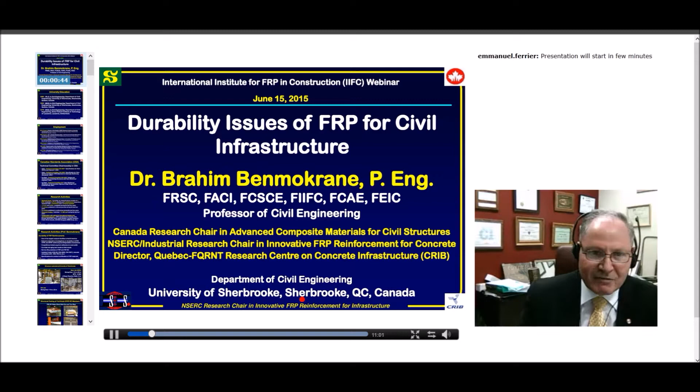Briefly, my university education: I graduated in '79 in civil engineering from École Polytechnique Fédérale de Lausanne, in Switzerland. Then after 4 years as a consulting engineer in Lausanne, I moved to Quebec, Canada in '82, at University of Sherbrooke, and I completed my master's in '83 and then my PhD in '86 at the same university.

From '95 to 2009, some of you may know that we had here in Canada a research network of centers called ISIS Canada, and the impact of this center was really huge here in Canada and in North America.

So during 14 years, we worked in this field of FRP, internal, external, and also on structures monitoring using fiber optic sensors and things like that. This was really a huge achievement made through this network of centers, with a lot of development of codes, design guides, and so on.

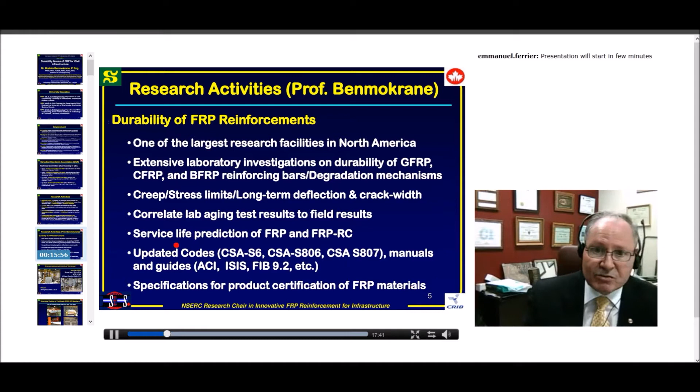Briefly, before going to the main topic of today, I wanted to show you some projects that are already completed, or some that are ongoing. You can see here, of course, I will be coming back to the durability issue and material issue. So here I will show the next slides mainly about structural testing.

This is one view of the old structural labs that we have. It has a strong floor, 10 meters by 20 meters. You can see here one full-scale underground chamber under test, a shear wall in the back, and one bridge pier under testing. We have many graduate students using it.

Also in 2009 we had a new structural lab, which has a strong floor 12 meters by 20 meters. We have an MTS machine of 16 meganewtons, and as you can see here, some L-shaped reaction walls 12 meters long. I use these walls mainly for testing shear walls.

I am planning in the future to test here one building having 4 floors, including all slabs, beams, and columns, internally reinforced with FRP, and looking at its behavior under gravity load and also under lateral load, mainly for seismic.

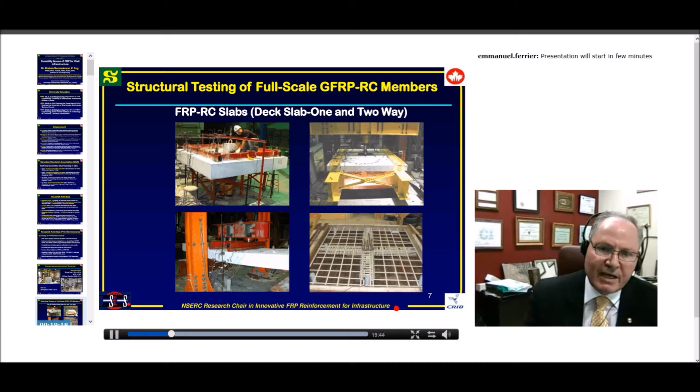This is two-way flat slab for parking garages. This is two-way slabs for bridges. You can see here we put the flexure reinforcement and also shear reinforcement made with FRP, as you can see in this photo.

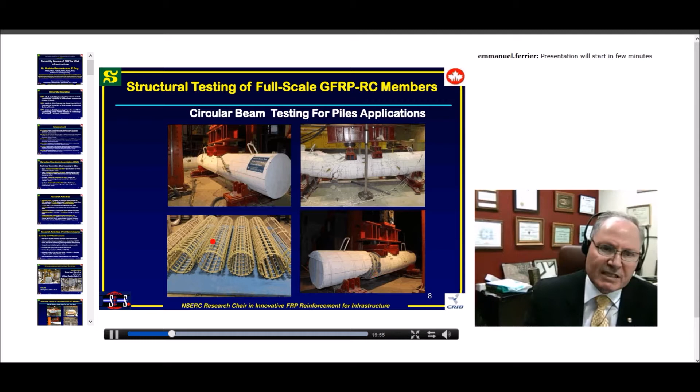Also, we tested circular beams. This is mainly for pile application, under flexure and under shear. You can see here the internal reinforcement, the cages.

Also, as I said before, we tested shear walls. This is mainly to look at the seismic behavior, mainly for building application.

We just also recently, in fact 2 weeks ago, completed testing columns. These are all reinforced with GFRP, under quasi-static loading, looking at drift, energy absorption and so on. We got really very interesting results. Some of the columns even went up to 8% of drift without any strength decrease, which is very good behavior. We looked at the behavior with different longitudinal reinforcement and also different lateral reinforcement for the concrete confinement.

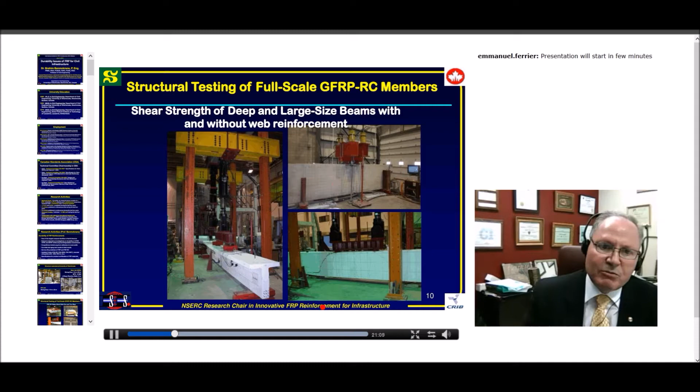Also, this is another view showing shear strength evaluation, T-beam section size effect here. This is to have 1.2 or 1.4 meter depth, and this is also about the deep beam that we tested with one PhD student.

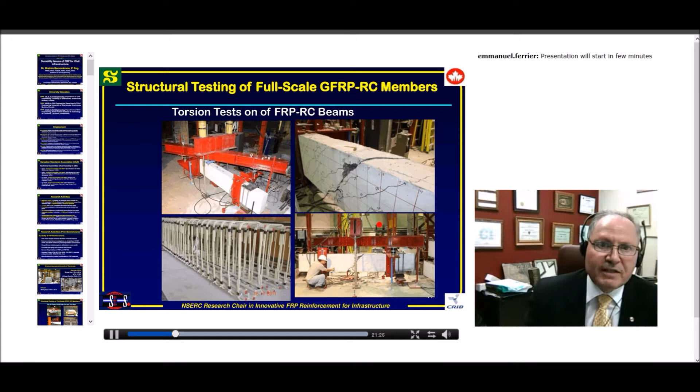Here also we did extensive work on torsion. We looked at this type of loading, and it happens often in bridges and also in parking garages to have this kind of load about torsion. Also we tested columns, rectangular section, circular section, short columns, slender columns with glass, with carbon.

Under concentric loading and also under eccentric loading, we are now establishing the moment load diagram interaction. We have really huge work on that, and this is mainly for code development and so on.

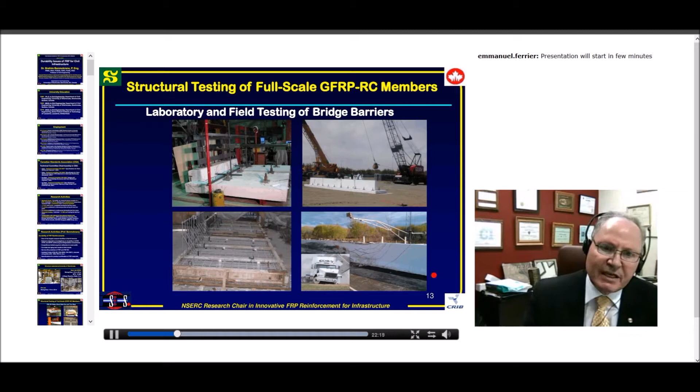And also we tested, as you can see here, this is bridge component, including barrier walls. As you can see here, this is under static load in the lab, and here under impact load in the field, and also this is under crash test we did in Texas, exactly how it has to be tested to approve the material.

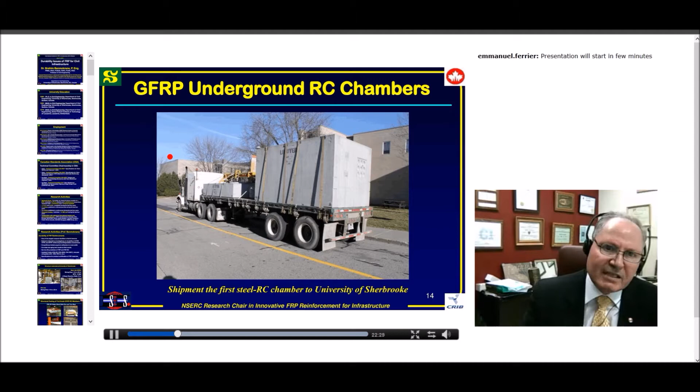Sometimes also we are bringing precast full structures for testing. As you can see here, the chamber, the transportation to the lab, this is during casting, and they were tested recently here in the lab.

Also, of course, from the lab, all this structural testing that I just showed you, some of it really helped for developing new applications with GFRP reinforcement. And of course, we move it to field applications. We have to do that because we can know more about the material and increase the extension of the use of this kind of material.

See here, I can show you a couple of bridges. You have one span bridge, you can have a continuous span bridge in cast-in-place concrete, as you can see here, or with precast element. I myself was involved in at least 15-20 pilot projects instrumented with fiber optic sensors. But in Canada, we have more than 400 bridges now where GFRP were used in the deck slabs.

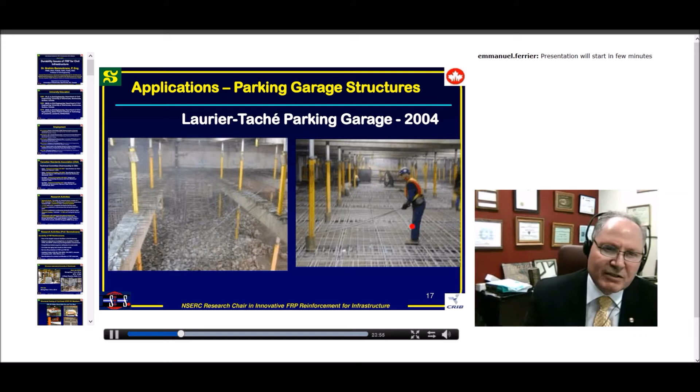You can see here also another example of parking garages. This is demolition of the existing structural slab and replacing them with new slabs with GFRP. This is one-way slab, and also we did two-way slabs for parking garage. This has a span of each bay of 30 feet, which is 10 meter length, which is really very long.

It was really a challenge, mainly about the deflection here, the behavior, and also about the punching shear behavior around the columns, but we addressed that very well with the designers, and all this is instrumented, and we know exactly about the behavior.

Also, concrete tank. This is also a very good application, mainly for chlorination for water treatment plant.

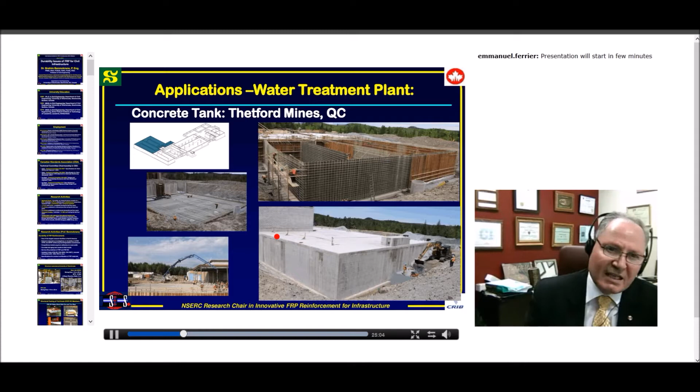As you can see here, this is the slab on floor, the foundation, all with the GFRP. You can see here the wall and the casting here, the cover slab, and you can see here all the structure completed. And this is all what was made with GFRP. I think now there are 2 or 3 of this kind of structures here in Quebec and also around the world.

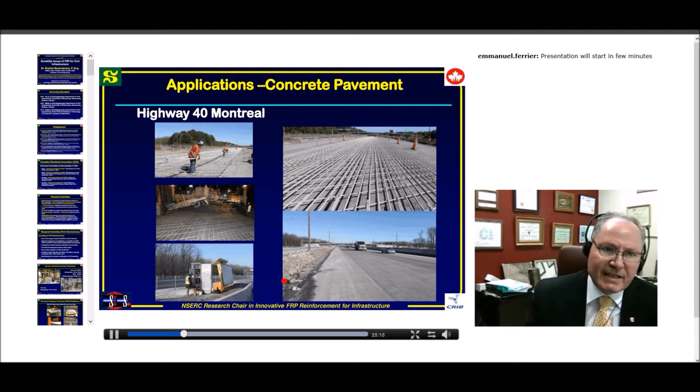We have also on highway, this is continuous concrete pavement in highways in Montreal and also other cities. One bridge on which I worked during the last 2 years, this bridge is now under construction.

The whole bridge is also being instrumented with fiber optic sensors, and it will be open to traffic by end of 2016. We'll be doing some live load tests also on this kind of bridge.

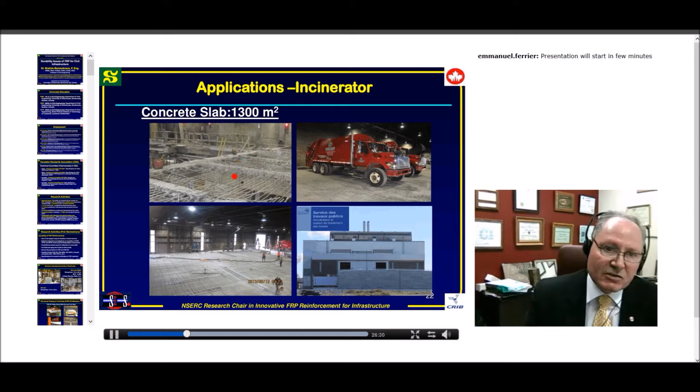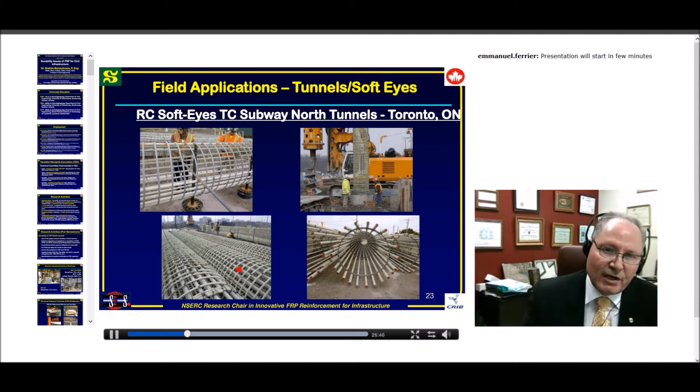Also, there's an incinerator - this is also a one-way slab that we did, like an asphalt application. You also have reinforced concrete soft-eyes, as you can see here. This is in the subway north tunnel in Toronto. We did that last year, and it was really a huge project. It was also a challenge to design for shear particularly.

And so if you go to Miami, you can visit it. We built some slabs, and we'll be taking cores from the wall and also from the slab, looking at the long-term behavior. Also one project in Morocco.

This is in Tangier - you can see here the jetty. It's really a beautiful area, as you can see here. All the jetty that we're having here, this is the boxes, 95 reinforced concrete boxes. You can see here the huge quantity of concrete that was used, and you can see here also the basalt bars that we used to reinforce the top of these boxes.

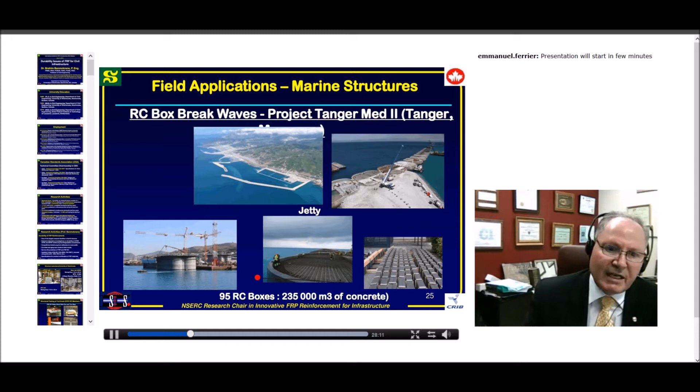I also did this with some international partners. So this gives you an overview about some projects that we completed in the lab and also in the field. As you can see, I think this FRP rebar technology is really progressing well, and now it's really being used at the international level, and I am very happy about that.

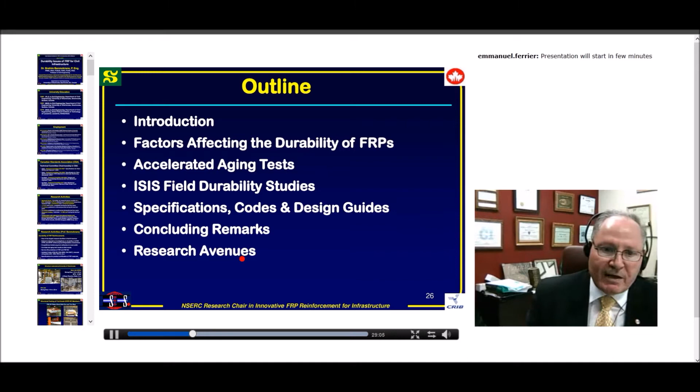Why is durability a concern? Because FRP is still a new material compared to traditional structural materials. Also, manufacturers are still doing innovation, coming up with new products or new materials, so these have to be evaluated, understanding and looking at their long-term durability. Currently, most codes are specifying 75 years or even more. The durability of this product has to be proven that it will at least last the service life specified in the code.

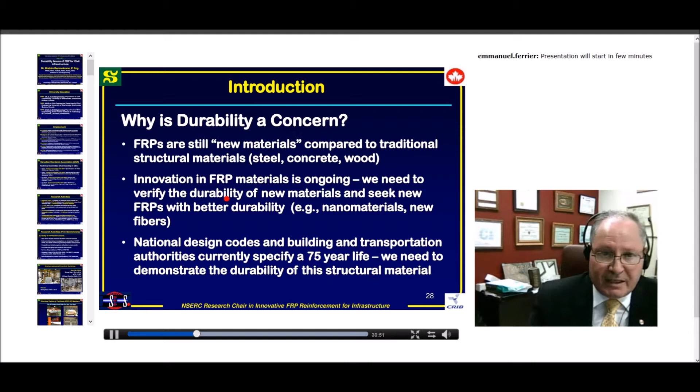Unlike steel, FRP are resistant to electrochemical corrosion because it's non-metallic. However, FRP could potentially deteriorate following exposure to some specific environment.

And the rate of deterioration, as I explained before, will depend on the type of fibers, the resin matrix, and the fiber matrix interface.

I can give you an example now. I am working on basalt bars during the last few years, and now one of the main issues about long-term durability of basalt is really dealing with the fiber matrix interface, because the industry is still facing problems with the sizing and finding material which has really good compatibility with the resin. So it's still really under research, and one of the key issues to be addressed in the coming years.

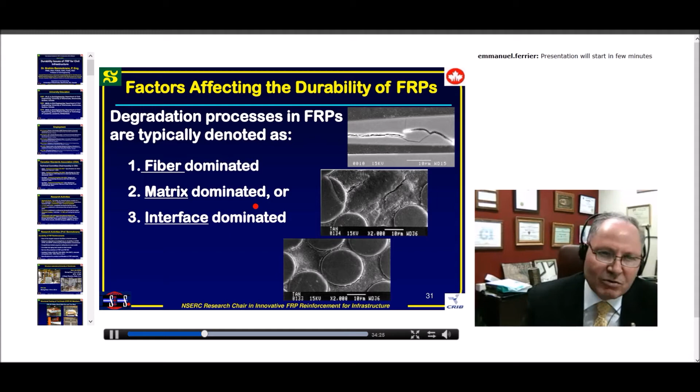So we know exactly how the material is degraded, but we know a little bit less about the interaction, because we can have interaction or synergic effects. As you know, by combining load and chemical, we can have some synergic effect, and we don't really know too much about this. From a research point of view, it needs study by looking at the synergetic effect, combining load, temperature, moisture, and so on. I can see this as a future area to look into this kind of behavior.

Of course, as I say, this material is really controlled by the microstructure, which is controlled by the choice of the constituent material, the interface - I'm repeating this - and also the manufacturing process.

The manufacturing process was really a huge issue. Maybe 15 to 20 years ago, when people were starting to develop this kind of material, there were really problems with that. I remember when I looked at this material by the end of the 80s, beginning of the 90s, and the product really was not very well manufactured.

But now the manufacturers have their own quality control, using advanced machines and advanced materials, and doing that really properly. And now, of course, with specification and certification, they have to produce a very good product. Otherwise they will not pass the qualification as specified in the standard and code. So we can say this is really well controlled, which is really good news.

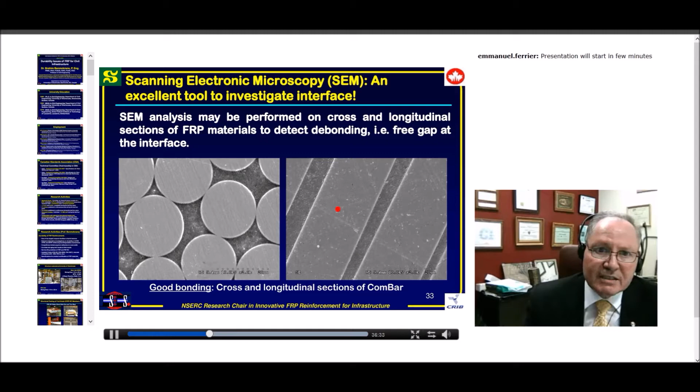And this is one of the bars, ComBar, I think it's from Schöck, that I did this investigation on. And this was done - I can come back with the manufacturing process.

If you look at rebar, there are mainly two manufacturing processes. Both are made with pultrusion, but some use closed die pultrusion, and others use open die pultrusion. When you use closed die pultrusion, you don't have access to the bar during fabrication.

So it's not really in contact with the atmosphere, and in general there is no void, as I showed with the shot. Sometimes, for the external surface, you have to add sand or do grooves after making the smooth bars. But when using pultrusion with open die, you have access to the rebar during manufacturing, and you can add helical fibers or any external deformation before the polymerization of the resin.

But since you have access, it means it's in contact with the atmosphere, so you can have some pores and things like that. So the goal is to have well-distributed pores, as I will show you later. This is really extremely important.

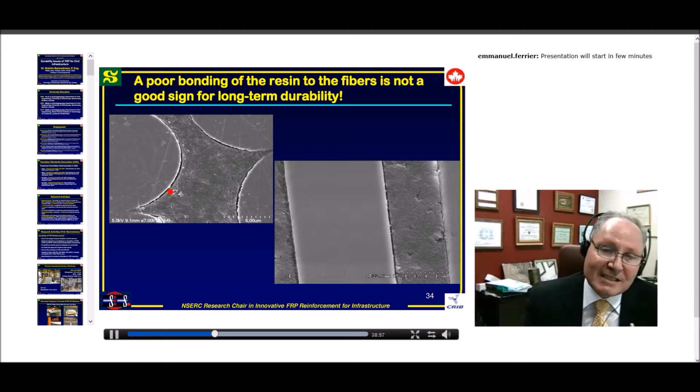I strongly recommend that when you are doing durability investigation, you also do microsectional analysis on the material as received, before conditioning, because sometimes you can find a lot of defects and problems in the as-received material. If you don't do it and start your investigation, you may come out with wrong conclusions, because the deterioration might have been in the as-received material, not really induced by the load or the environment. So I would strongly encourage you to look at the microstructure of the as-received material and check if there is any defect or not.

Also regarding interface characterization, you can do it before testing and also after testing, on the fractured area, which gives a very good idea about the interface. As you can see here on the left, this is a fractured area, and you can see the resin is still bonded to the fibers, which means really good interface integrity.

But as you can see here on the right, you can see smooth fibers, and all the resin was removed because the failure was mainly at the interface, which is really poor bonding. So this will really explain it to you.

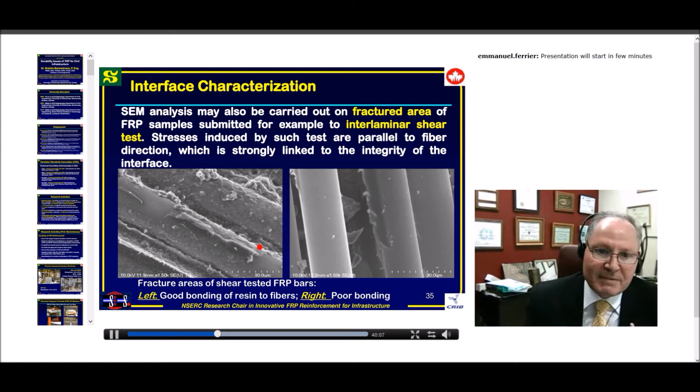Long-term durability could be affected, as I said before, by porosity gaps, as you can see here, or it can be by fiber impregnation, as you can see here. You can find this kind of defect in as-received materials, so you have to look at it before really starting your testing and studies.

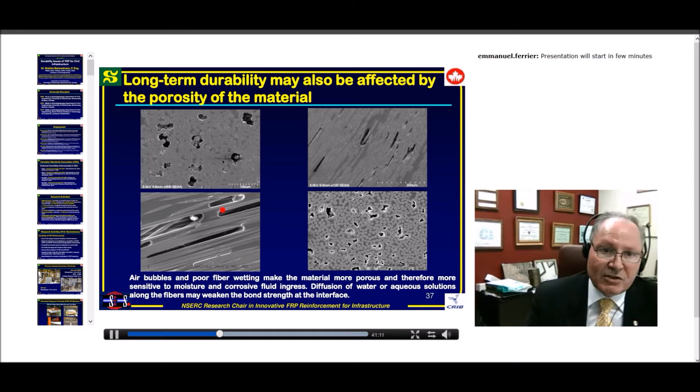Glass transition temperature is really a thermal property which is extremely important. We can measure it with DSC or with DMA. We have ASTM standards on both methods. Either way, it gives a very good idea about the long-term stability of the resin, and by investigating the glass transition temperature we can know more about the behavior of the resin.

And it's extremely important that all good FRP should have a completely cured resin system with high glass transition temperature and low moisture absorption. This applies for factory-made products like rebar made by pultrusion, and also applies for external reinforcement for field application.

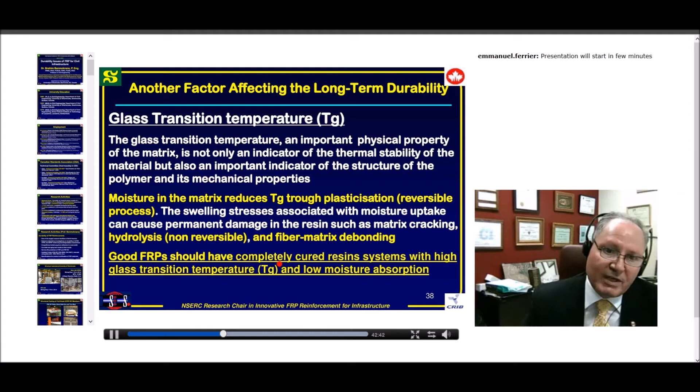As you know, when it's made by hand layup, we also have to consider this thermal property.

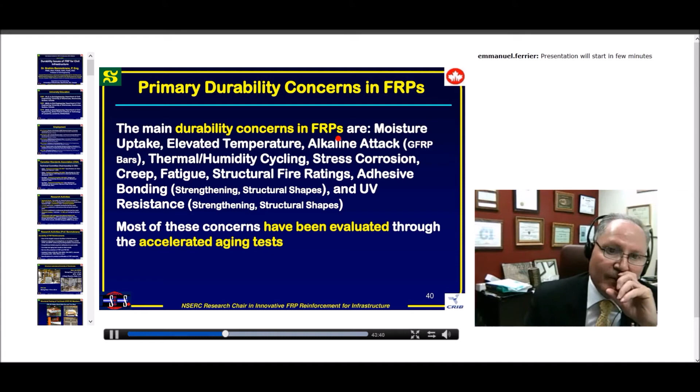Primary durability in FRP, as I said before, when we are using FRP in civil engineering, we are facing different kinds of environment and different kinds of load.

It can go from moisture - we cannot avoid the presence of moisture in civil structures. We can have temperature depending on the application, elevated temperature due to fire, and alkaline attack as an example. There is really a variety of environments, and we have to look at mostly all of them. Some could affect more than the other.

For example, for internal reinforcement like GFRP, we know that alkaline is one of the critical issues, and we have to look at it before looking at the rest.

But as I mentioned, please keep in mind about moisture. If the application with the FRP doesn't have too much moisture, I think everything will be fine with long-term durability.

Of course, by addressing this in the lab, we have to generate data for long-term behavior. We cannot build structures and wait 75 or 100 years to know if the material is durable or not. So during the last few years, researchers developed what's called accelerated aging tests, mainly by accelerating the degradation using elevated temperature.

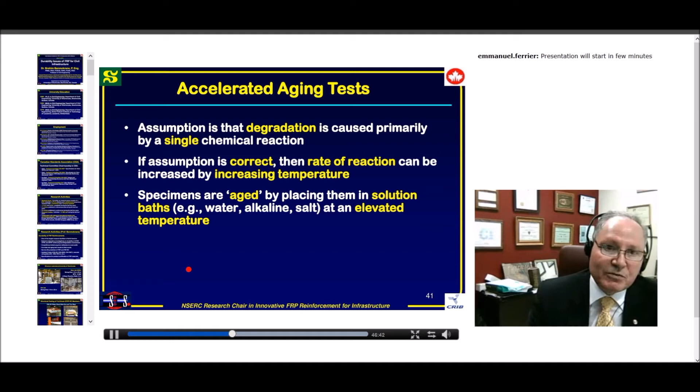It could be from the resin, mainly from the interface, or from the fiber, as I explained before. We can see this when I explain the results and the curves later - we can see if this assumption is fulfilled or not.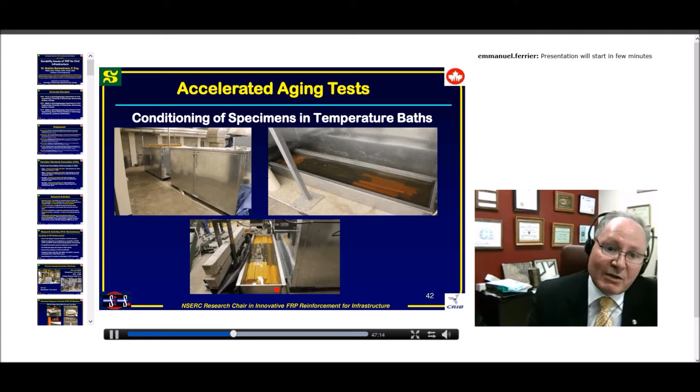So conditioning here - I'm showing specimens in a temperature bath. This is not really under load, because if we have load, we will have a synergetic effect, which could also be investigated. But mostly we are doing that without load, and we are limiting the load to the minimum to avoid inducing any other problem.

This is what I showed you before - the bars or FRP are directly immersed in alkaline solution. Sometimes the bars or FRP are embedded in concrete placement, and we have them in water, so we are directly using the concrete as alkaline. Also here we have bars in a concrete block, looking mainly at long-term bond and whether there is any degradation at the interface.

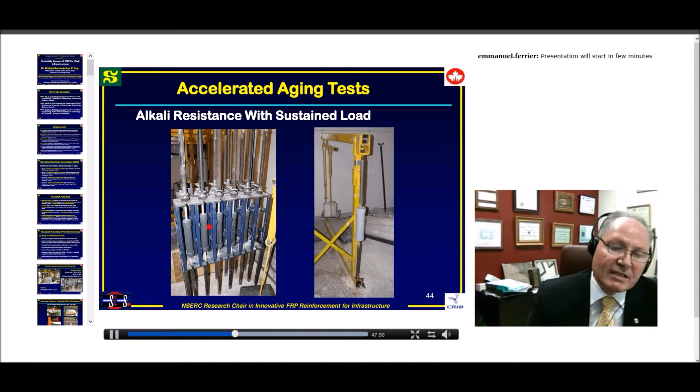Also we can have them under load, as I show you. This is some of the testing here in Sherbrooke that we did during the last few years. I'm showing you some slides from the research lab that we have here in Sherbrooke.

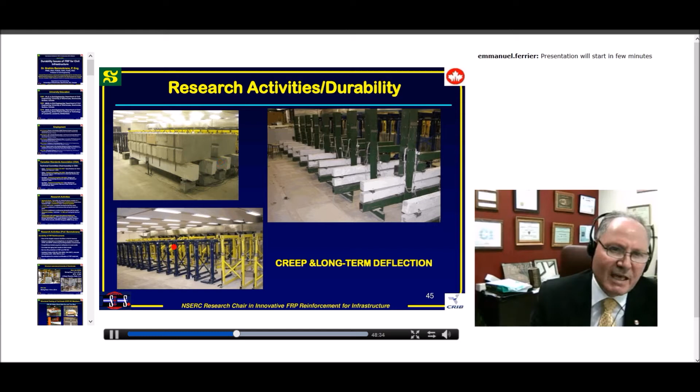As you can see here, we are also investigating the long-term deflection. These are from 2007, 2008, and this is all loaded under service load with gravity load from the concrete blocks. Also here we have beams of small size, and this is really full-scale beams. And also we have creep frames under load, different load, and so on.

We can do them also in beam, as you can see here, under freeze-thaw cycles and under sustained load, and then we can look to the long-term behavior by investigating the deflection behavior and also the capacity of the beams. We can also extract the bars from the specimens and do the tensile test. We can do really a variety of testing, mainly about the objective that we are looking at here.

The cycle that it was done from plus 20 Celsius to minus 20 Celsius, and this data was really very helpful to develop new codes, new standards, and also to convince engineers to use this material with this kind of testing, showing them the performance of the material under such environmental testing.

This is also the kind of result that we can achieve. This is about moisture penetration, and as you can see as a function of the ambient temperature - 23, 40, 60, and 80 - as you are increasing the temperature, the rate of diffusion is increasing, and also the maximum moisture is increasing, as you can see. This is why the temperature is being used as accelerating aging, as seen here.

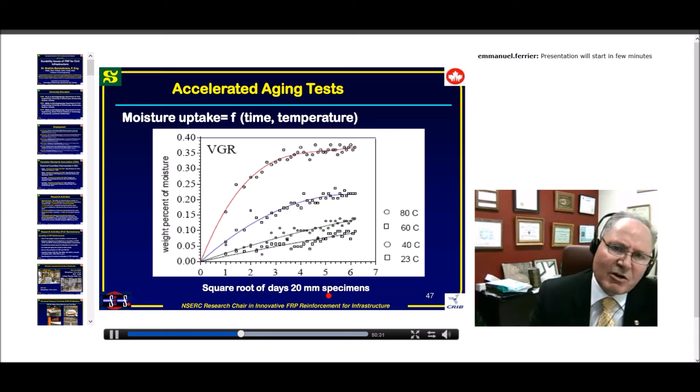So it will happen exactly the same thing in the specimen that you will be testing. And we can even find from this curve the accelerating factor from 20 to 80, or from 20 to 60. I have a couple of papers on that in the ASCE Journal of Composites that you can look at.

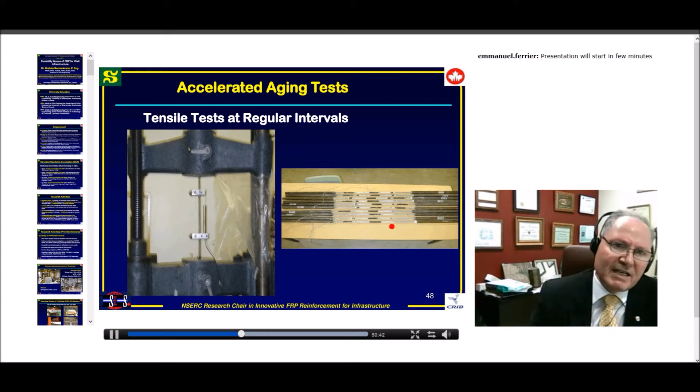Okay, then after we can also run tensile tests. This is mainly for the strength retention, as you can see here. I'm showing it for rebars, but you can do it also for external reinforcement, like laminate and so on. And then from this test result we have the tensile strength, and this is an example showing it in water. We can also derive the same result for alkaline.

This is about the days in conditioning, and we have different temperatures: 80, 60, 40, and 23. And as you can see, as we are increasing the temperature, the strength retention is reduced. And from this we can derive

long-term strength. So to derive long-term strength, of course this is based on the Arrhenius relation, as I said before. Here I am reporting one procedure developed by Larry Bank in 2003, which needs 3 temperatures of aging and 4 periods of immersion.

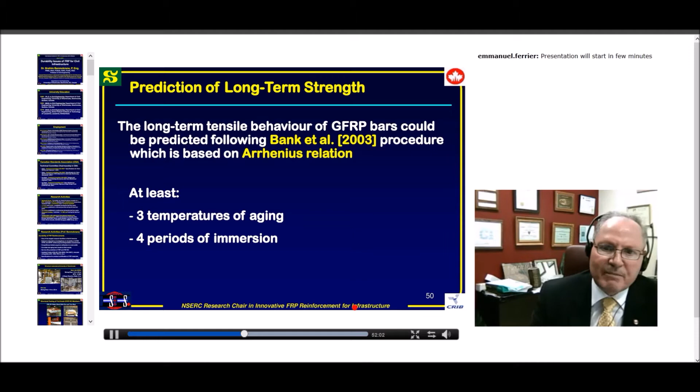So here it could be like 20 ambient, 40, and 60, and here it could be 4 periods of immersion, like 45 days, 3 months, 6 months, and 1 year, as an example. Or 1,000 hours, 3,000 hours, 5,000 hours, and 7,000 hours, something like that. And from this, this is from Larry Bank, we can draw these kinds of curves.

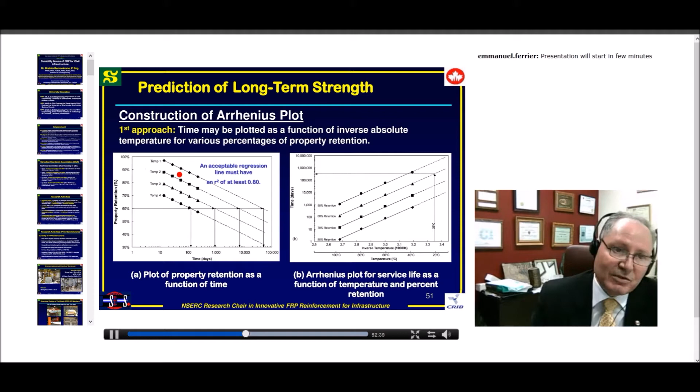And if we look here, all the curves are really parallel, which means we have only one degradation mechanism, to which the Arrhenius relation will apply. Otherwise, if they are not parallel, it means we have some combined, two or three degradation mechanisms, and we cannot use Arrhenius. So you have to be really very careful when you are doing this testing, and you have to have this - they should all be parallel as shown here.

And from this we can draw the strength retention as a function of time, in years, and we can do it with any temperature. Here I draw it with like 50 Celsius and here 10 degrees Celsius, like an average annual temperature.

It doesn't really mean that our material, when it will be in the field, will behave exactly this way. I think what we observed from the field is the strength will not be as what we tested in the lab, because in the lab, of course, we used a very aggressive environment. But it will give a really very good idea, and of course it will be convincing for the engineer. And we can also be very conservative, as you know, and this is what we have in our code, by specifying the reduction factor that will take into account such results from the lab.

So a couple of years ago, through ISIS Canada, as I mentioned before, in 2004, we were really very interested to know about the material that we implemented in different bridges here in Canada.

We were really very curious to look at how this material is behaving and what is the state of this material. So we did a study of GFRP as internal reinforcement in 5 in-service field structures. We did that also in 2006 for external reinforcement, as shown here at the bottom of the slide.

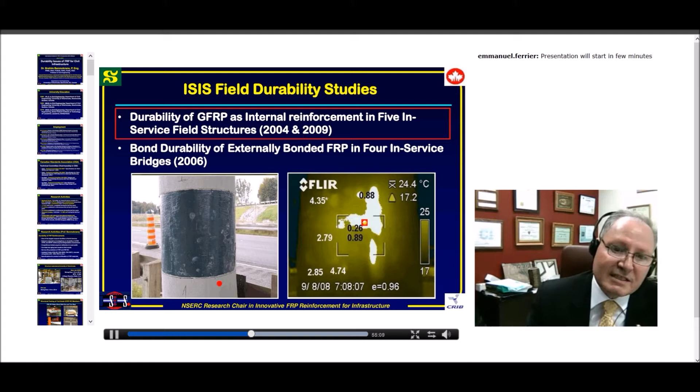I will be focusing mainly on the GFRP because this study clearly showed that the GFRP bars were behaving very well. At the time, in the Canadian Highway Bridge Code, we introduced GFRP as main reinforcement in bridge components, because before it was only secondary reinforcement. This field study was extremely helpful to introduce GFRP as main reinforcement.

This is a photo showing the people involved in this 2004 ISIS durability study. You can see myself, Dr. Nemy Banthia, Aftab Mufti, and Maqbul Fiza, representing British Columbia, University of Manitoba, and University of Saskatchewan.

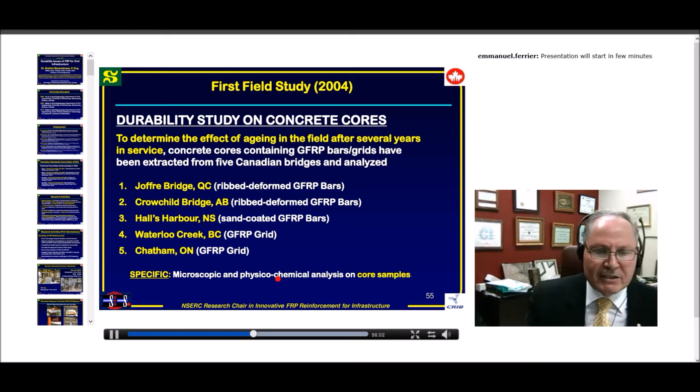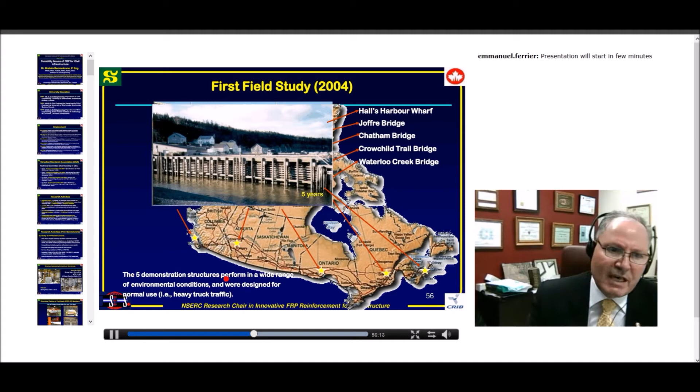So we took cores from all these 5 bridges: Joffre Bridge here in Sherbrooke, Crowchild Bridge in Alberta close to Calgary, Halls Harbour in Halifax, Nova Scotia, Waterloo Creek in British Columbia near Victoria, and Chatham in Ontario. We did microscopic and physical-chemical analysis, looking under the microscope. So we took cores from all these structures and from 5 demonstration projects.

You can see here the cores and the bars. We took them from the barrier walls, from the sidewalk, and from the slabs, and so on. We sent them to the 5 universities and performed all the tests. It was performed independently by 3 research teams located in 3 universities: University of Sherbrooke, University of Manitoba, and University of British Columbia, and also Saskatchewan with Maqbul Fiza.

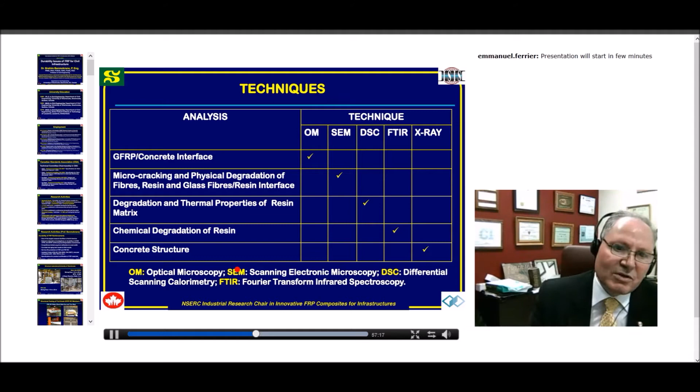This is the technique we used in analysis. We looked at the GFRP-concrete interface using optical microscopy, microcracking, and physical degradation of the fiber, resin, and glass-resin interface by SEM analysis, degradation and thermal properties by DSC, chemical degradation of resin by infrared, and concrete structures by X-ray diffraction. We also did EDX, not shown here, and many other analyses.

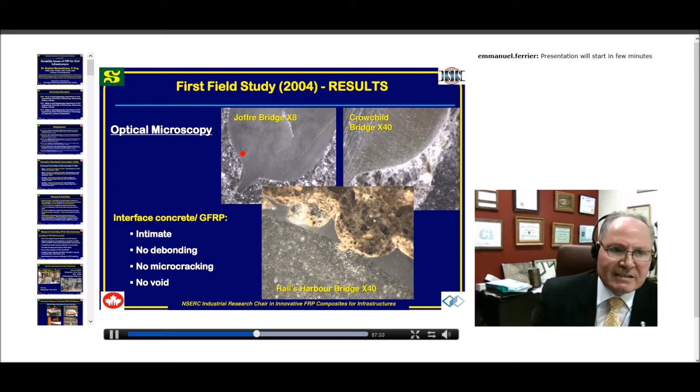Here are some slides showing the optical microscopy near the interface. Here, showing 3 different structures, we can see the interface is really intact with no debonding, no micro cracks, and no voids in the GFRP.

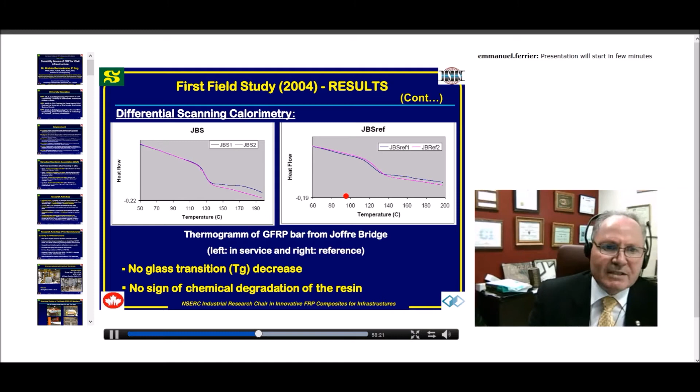Also about DSC scanning, we compared the reference specimen on the right with the in-service specimen, and you can see they are quite similar, showing no sign of degradation of the resin. This is from the infrared spectra of Joffre Bridge, and comparing this curve to that curve shows the same thing - no chemical degradation, which would be hydrolysis.

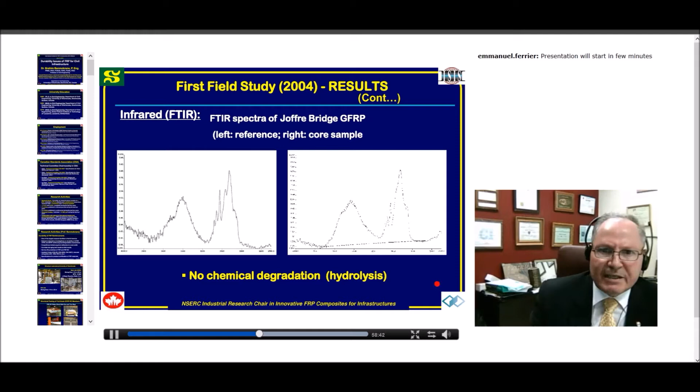So from this, we come up with this conclusion. At that time, the structures had 5 to 8 years of service condition. Of course it's not too much, but it shows something, because I remember in 2003-2004 we looked at some papers done by researchers from lab testing showing that GFRP, when put in concrete, starts degrading immediately. Some papers, published in ACI Structural Journal, showed the service life could be maybe 1, 2, or 3 years. But from our accelerated aging and field tests, even at 5 to 8 years, there was no degradation shown. So it was really very encouraging and very positive results.

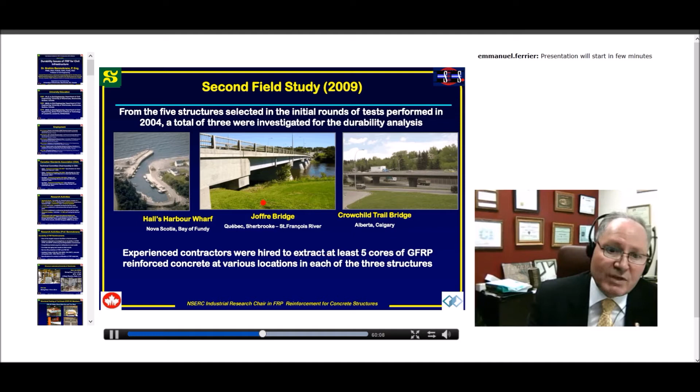And we decided to introduce GFRP as main primary reinforcement in bridge components, but limiting the stress to a maximum of 25%. From this time, we did another field study in 2009, bringing the structures to 13 years, and we have almost the same results as you can see in this next slide.

So we also looked at the interface, as you can see here, and there is no degradation. It's almost the same result as in 2004. This is from SEM analysis, as you can see here, the fibers and also the resin.

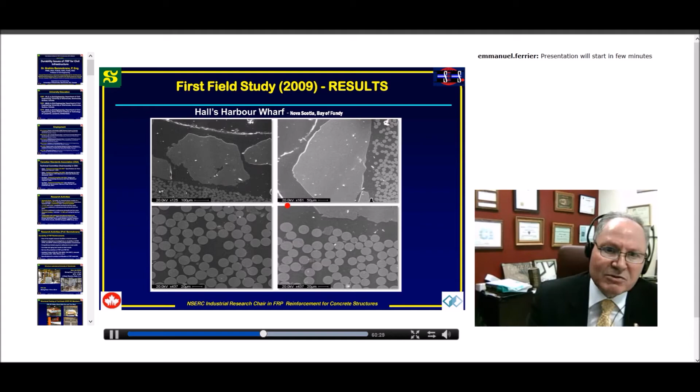This is another bridge, the Joffre Bridge, as you can see here. It's really very, very positive results, and we are planning to repeat this kind of field study by 2016. At that time, we will have almost close to 20 years of data, which is good. I can tell you there are hundreds and hundreds of structures here in Canada and in many other countries using GFRP.

The reason people are using GFRP is because, in terms of cost, cost is really the key issue when you are using a new material. Of course, GFRP has the lower cost compared to carbon, aramid, or any other FRP. So this is the reason why.

Even from the field applications that I showed you before, parking garages, bridges, and many others, we did cost analysis comparing the same structure reinforced with steel, black steel, galvanized, or epoxy coated bars, compared to GFRP. We're not really looking at life cycle cost, only first cost. Even now, the first cost is almost the same by using GFRP or using other metallic reinforcement like galvanized or epoxy.

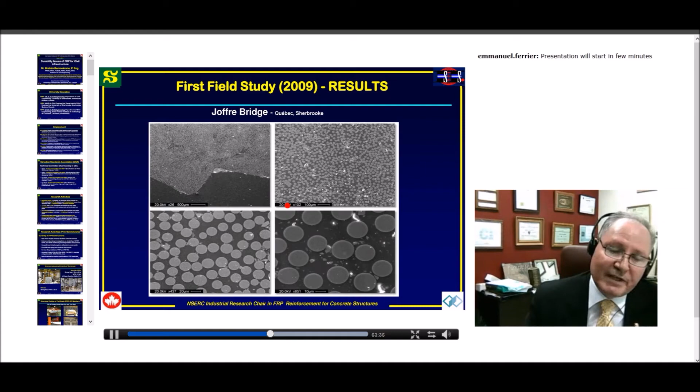Now I will talk about some material specifications we have here in North America. I know in Europe they are doing the same thing. Here, we came out in 2010 with the specification for internal reinforcement for rebar, and in 2014, last year, we came out with external reinforcement. We also have the ACI from 2008 with the internal reinforcement, and here this X should be 2013.

I'm sorry, I did not modify this slide. I think it's dated from 2011, 2012. This should be 2013 here, and it was developed and also published. We have the International Code Council, ICC, also on external reinforcement.

So about the North American standards, this is for internal reinforcement. This is the Canadian one, and it was really, at the time, the first code in the world, the first standard. Now we are working on internal reinforcement from both sides, Canada and US. I think we will have it by next year.

It will be an ASTM standard dealing with the material specification for deformed and sand-coated GFRP bars. The document has been balloted 2 or 3 times, and I think it will be ready by the end of the year. I hope that this ASTM standard will be used internationally or globally. I think this will be fine, to have something used all around the world.

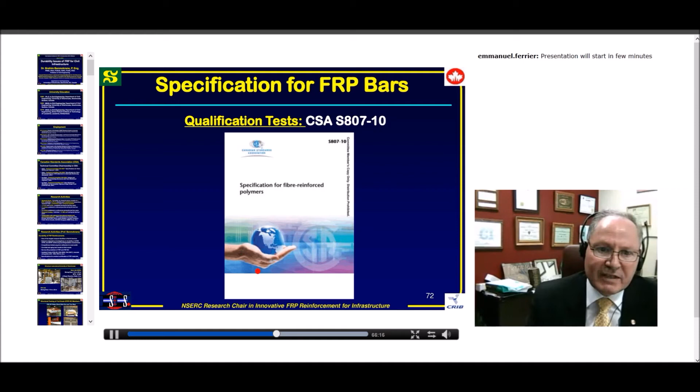We came out with that in 2014, and the equivalent ACI one is from 2013. I will show you some slides about these standards later. So if I start with the S807, I will show you only some clauses dealing with durability.

So the scope of this standard really deals with internal reinforcement, and we are talking about non-prestressed internal reinforcement, mainly FRP bars or grids used for bridges, buildings, and marine structures. So we are fixing the manufacturing process, the material, the qualification, everything.

So any manufacturer wanting their product approved by any governmental authority or any private organization has to go through the qualification process, showing that their product really fulfills all the criteria in the standard. Otherwise, it will not be approved and not be used.

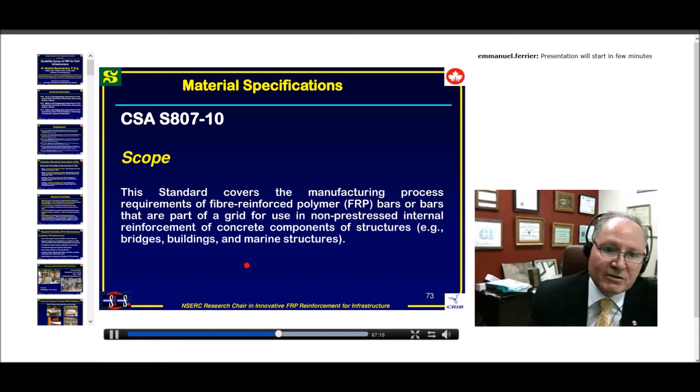And this is very good for both engineers and users, and also very good for the FRP industry, because if we don't have the standard and any industry could manufacture bars, we could have huge problems and catastrophic failures, and everything we did during these 25 years could be lost in one minute.

So we have the physical and durability properties. All these kinds of properties have to be evaluated. Mainly here you can see alkali resistance in high pH solution, void content, cure ratio as I talked before, water absorption, and creep and fatigue also has to be done. I don't really want to go through all this.

I put it only to show you the property here on the left, and then the qualification test, where we specify the number of tests and so on. Here we have the manufacturer quality control, how many tests they have to do. The owner quality assurance, this is for field application, and there's also something that could be provided as a request. And here we have the test method, and here the specified limits, giving a number. So this is how it works: property, qualification test, manufacturing quality control, quality assurance, provided as request if it's not in industry, then test method and specified limits.

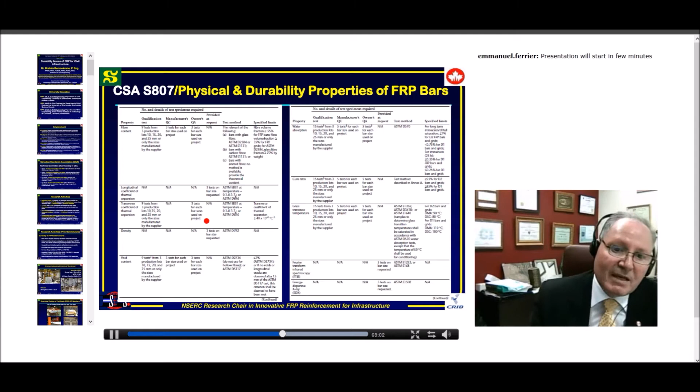So we have them for fiber content, water absorption, glass transition temperature, and so on, with the number of tests, the number of lots to be tested, etc., as you can see here.

And this is a summary of durability-related provisions. We have limits on diluent and certain fillers, limits on low-profile additives, which manufacturers mainly use to control shrinkage. Non-blended resin—we don't allow two types of resin; it has to be the same type and same category. There's a lower limit on glass transition temperature and cure ratio; we specify minimum cure ratio and minimum glass temperature.

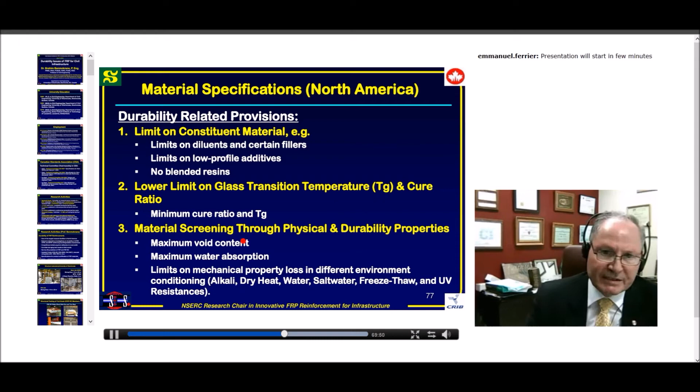And material screening through physical and durability properties—void, water, and so on—many properties, as you can see in these slides. This is an example of the limits from S807: water content, void content less than 1%.

This is very good—I can tell you most now about the internal reinforcement, about rebars. If made by pultrusion open die, in general they're getting 0.5, 0.6% void content. But with closed die, sometimes they're getting 0.1, 0.2%, because as I told you, there is no contact with the atmosphere and the void content is really less, also taking care about the speed and everything to avoid cracking from thermal stresses and so on.

Anyway, water absorption, cure ratio, glass transition temperature, and alkali resistance greater than 80%, 70%. Maybe some of you will ask where these numbers come from.

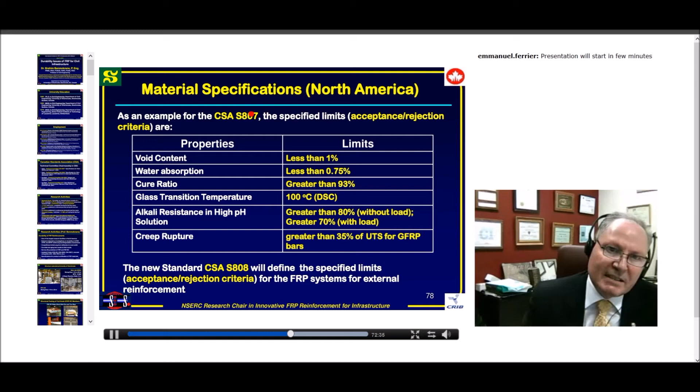Okay, next is another topic I wanted to talk about. This is a new slide I introduced about fire resistance. As you know, we have here in the Canadian code the S806 for fire resistance - I'm talking about internal reinforcement.

We addressed that really by using some charts. We have them in Annex O in S806, and we addressed that only with the concrete cover. It was mainly derived from finite element analysis and theoretical analysis. So we used the time rating that we have here for buildings, by the Canadian building code, which is 2 hours for buildings.

But we were not having any test results. So when we developed the S806 code in 2012, I was really one of the people responsible for the clauses regarding fire resistance, because when I show you a couple of parking garages - when we did these parking garages we specified a concrete cover of 60 millimeters, and at that time we said hopefully in the future we can do some tests and maybe this concrete cover could be revised.

So we did testing last year, and as you can see here, these are 2 slabs reinforced with FRP. They were really designed like a slab for parking garages in terms of stress under service load. I will show you later.

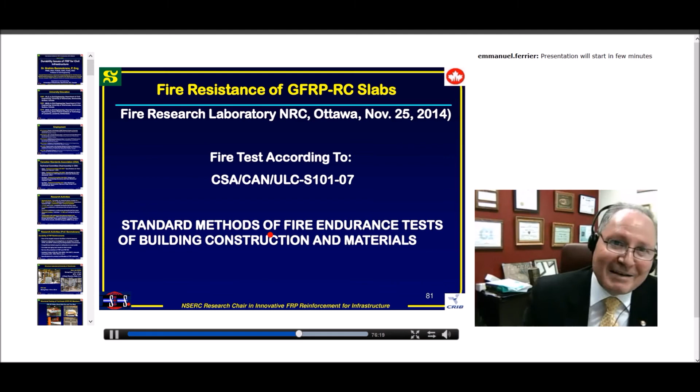This is exactly the same as ASTM E119, it's only a fire test, and the test was done on the 25th. I can tell you at that time I was extremely stressed, because, can you imagine, depending how much time the slab will last, it could have a big effect, as you know, on the whole industry. This is showing the hydraulic jack.

This is from the top of the slab, showing the hydraulic jack. As you know, we applied uniformly distributed loading, exactly as it has to be done, and we generated in the tensile reinforcement at the bottom about 2,800 microstrain, which is really a little bit above the service strain expected in the field. So it was really done properly.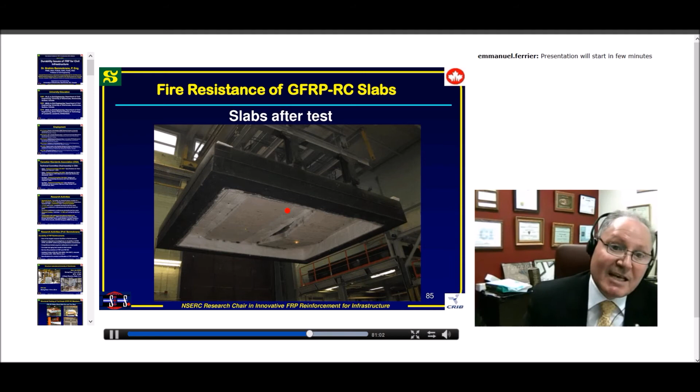So I can show you here some others. This is the failure of the slab. As you can see here, the failure, it was really by tensile failure of the bars, as you can see here. This is in the middle of the span of the slab where it failed.

You can see the bar, it was having the color green, and now it's already black, as you can see, due to the fire. And it was by rupture of the bar, and it was about, as I told you, 3 hours and 10 minutes.

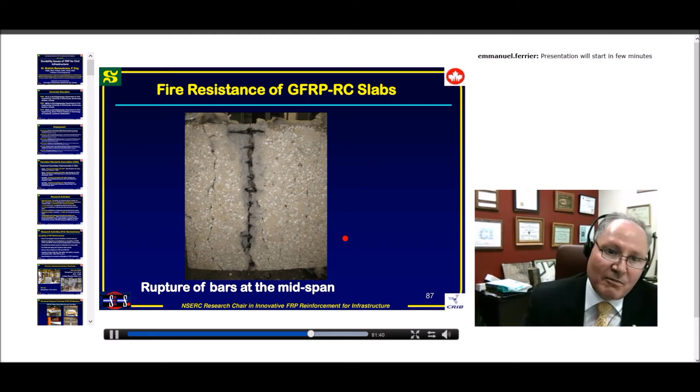So it was really extremely positive results, and hopefully, as I'm telling you, we'll be repeating for 40 millimeters.

Now I move to the external reinforcement very quickly before concluding, to talk to you about this new standard dealing with the external reinforcement, and this covers mainly the layup composite system. It's really being used for hand layup. It's not yet used for pre-cured or FRP bar because we have the S807.

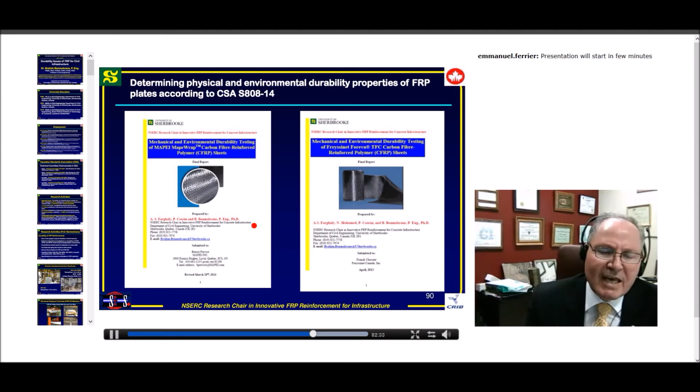So here, during the last few months, I did some testing mainly with 2 companies. This is showing, I think, with MAPEI from Montreal, the original company is from Italy, and this is from Freyssinet from Ontario, and the original company is from France. So I did for them a couple of testing according to this standard.

And as you can see here, according to the S808 for the external reinforcement, this is really the main testing that we have for the environmental durability.

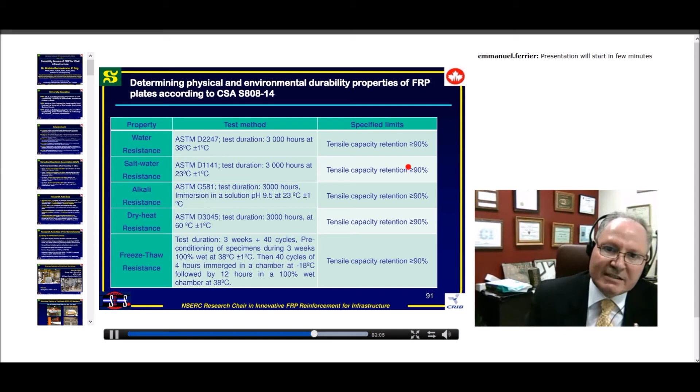We have water resistance, salt water resistance, alkali resistance, dry heat resistance, and freeze-thaw resistance. Here you have the duration, the standard test method, and the specified limit. It's mainly tensile capacity retention, greater or equal to 90%. This is for the Canadian standard.

If you look to the US, the ACI, we have the same testing with the same ASTM, the same conditioning, but the percent retention in ACI is less conservative - 85% compared to 90% in the Canadian standard.

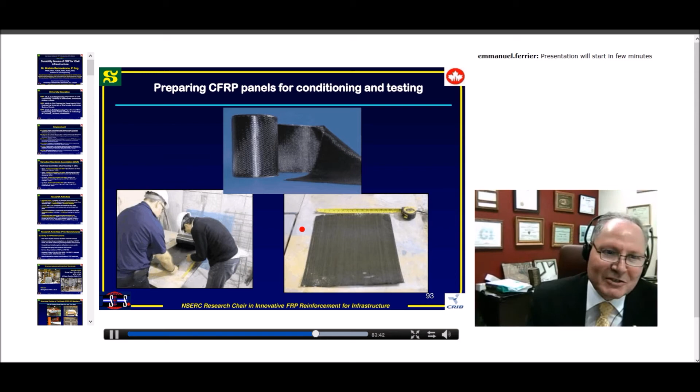This is showing some preparation of the specimen - my colleague Emmanuel knows more than me in this field. This is showing the FRP, the carbon sheet, and preparing the panels, as you can see here in the lab.

We did with different layers - 1 layer, 2 layers, 3 layers, and so on. This is all the panels prepared for exposure in salt water, alkali, dry heat, water, freeze-thaw. Of course, if you are using this material in the Middle East, maybe there is no need to be qualified for freeze-thaw, but here in Canada it's important to do that.

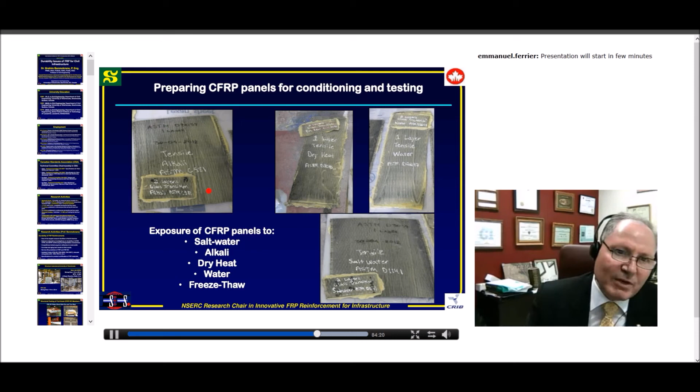Here we also did glass transition temperature by DSC, because when we complete the conditioning, we also have a limit on the temperature - it has to be, I think, 50 Celsius.

As you can see here, the control is 62, and water is 60, 58, 61, 54. What we found is dry heat was really the most critical from this testing, for both mechanical properties and also glass transition temperature.

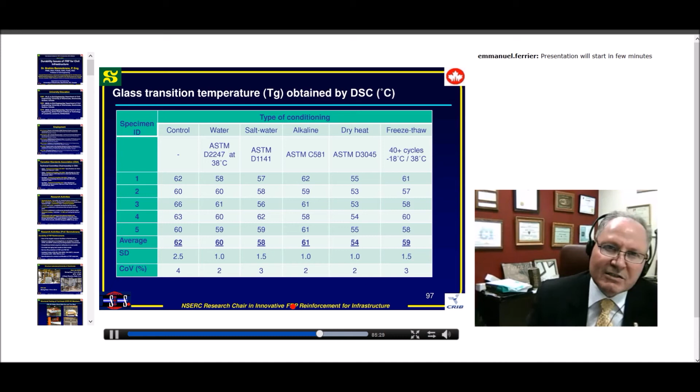For the DSC, be very careful if you are doing it, because in the standard we are specifying a number with DSC, but also we have a number with the DMA. With DMA you have 3 approaches to determine it - looking at chemical degradation, physical degradation, or mechanical degradation, you have different kinds, but there is one kind which is close to the TG. So be careful about that.

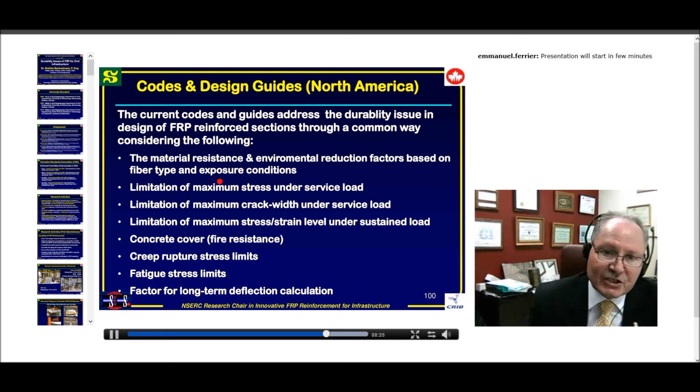So maybe this one, I think we can make huge progress - creep rupture, fatigue, stress limit, and factor for long-term deflection, as I mentioned in my introduction.

Some example in the S6 code, this is the Canadian Highway Bridge Design Code - resistance factor, we have 0.55 for GFRP. This means by using the characteristic strength, which is the mean minus 3 times the standard deviation, this is the 99.9 percentile, meaning one value over 1,000 specimens will be less than the characteristic.

With this value, we are using only 55%. This is to show you how we are conservative by using this type of product. It could be changed in the future.

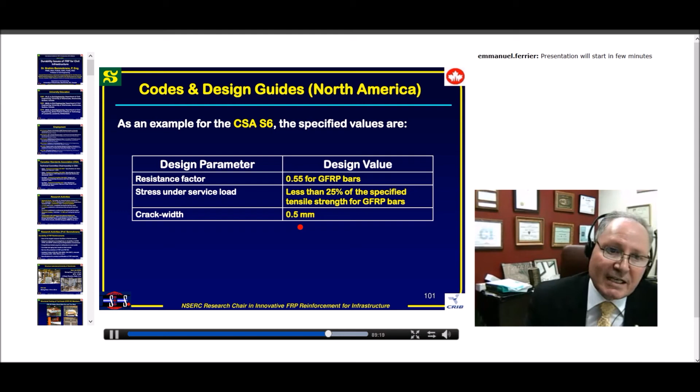Stress on the service load, as I said before, is 25. And crack width we put a little bit bigger than for steel bars, which is 0.5 millimeter.

Because it's non-corrosive. Advances in FRP material durability, as I said before, the industry now benefits from new materials, like high performance resin with low diffusion and permeability, and better, more consistent performance in new materials from fiber manufacturers.

It's not really true with the basalt fibers now. It's still not consistent in the raw material and also in the variability of the material. This is really progress that should be made by the industry, mainly for the basalt bars. But for glass and carbon, I think this is all well controlled.

Continuous improvement on process and product quality control, as I said before, because now the industry has to do their qualification with the new standard, and they have to improve all their process and product quality. Now there are more manufacturers, so they have to be competitive. So I think it's very good for the industry and end users to benefit from products of high quality and reduced cost.

When everything is working well, all the lines are green, and when problems start it comes to yellow, and when there's a problem it comes to red. So this is advising if there is anything, and this is all with sensing of temperature and many other properties being evaluated.

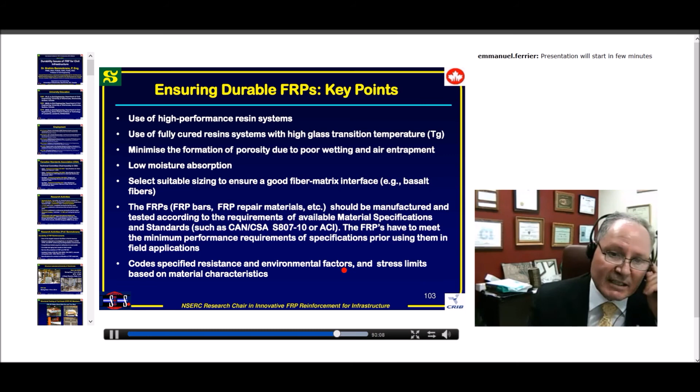Minimize the formation of porosity, as I said before, and fiber impregnation also. Low moisture absorption. Select suitable sizing to ensure good bond - this is an example, basalt, I'm mentioning here. FRP bars should be manufactured to standard, and code-specified resistance and environmental factors and stress limits should also be used in your design.

And here you have some concluding remarks. Of course, corrosion resistance is without doubt the main motive and attraction to use FRP over steel. And now it's becoming really like a conventional material.

Now the material is, of course, used from the beginning of the project, and the contractor has to prepare the tenders and submit them to the consulting engineering field, going through the whole selection.

Mode of degradation, as explained before, is really well understood, but we need something really dealing with the synergetic effect, like combining load, environment, and temperature, and so on.

Test method, I think we have what we need now for testing. And application in different areas now, we are getting FRP being applied really in various applications. Now I'm working on some projects dealing with driven piles. I am planning to do some testing on the US East Coast for marine application, looking at the behavior of this material.

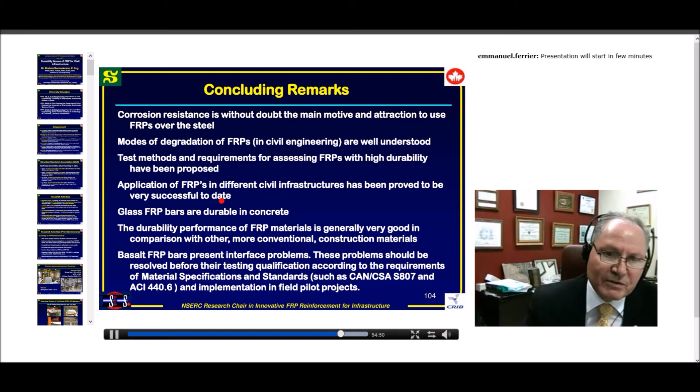Glass, we've proven it's really durable. FRP bars are durable in concrete, and the durability performance of FRP material is generally very good, based on lab and also field studies. As I say, basalt still has some interface problems that need to be resolved before this material will be used in the field and so on.

Some research avenues that you can look into, and maybe it could be very interesting. This is really about aging of in-service structures. This is really very good because it can be used to prove the durability of the material, and also it could be used for establishing correlation based on accelerating aging tests. This would be really extremely good to develop some life predictive models, based on field testing and also accelerating aging tests. And there are some other topics that I am mentioning here.

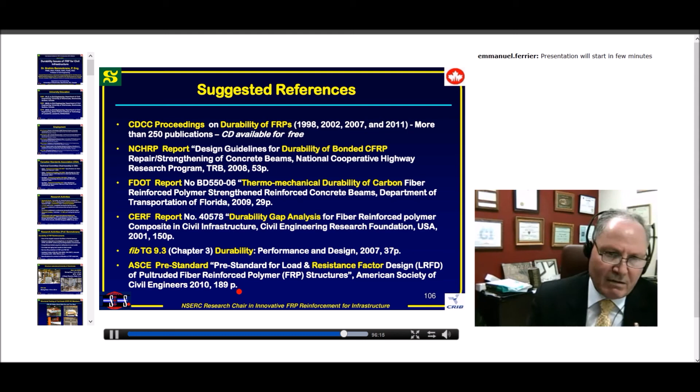Some suggested references, as you can see here. These are conferences that I organized myself in 98, 2002, 2007, 2011. I am planning to organize one next year, maybe here in Sherbrooke, next summer. So if you are doing some research on durability, I will be glad to have you here in Sherbrooke. There is also this FDOT report, and some other reports that you can look at. I would like to thank you very, very much.